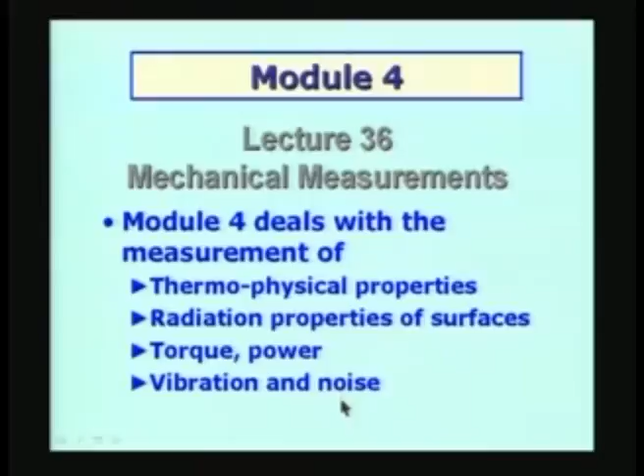The first topic I am going to look at is the measurement of thermophysical properties. It is a very vast area, and necessarily we have to restrict to a few important thermophysical properties. In my opinion, these are the ones which require a little bit of understanding, and the measurements are somewhat involved, and therefore I have included them in the presentation in this lecture and the subsequent lectures to come.

The quantities which will be of interest in thermal science basically are the properties of materials like thermal conductivity, which of course could be for any of the states of matter, solid, liquid or gas, and each one of them has a specific problem attached with it. Therefore we will certainly look at the measurement of thermal conductivity of various materials in the three states of matter.

We will be interested in the thermal capacity or heat capacity of the materials, and that will be dealt with subsequently. One of the important things which we require when we talk about power plants, either based on fossil fuels, gases or liquid fuels, is the measurement of calorific value of fuels. So we will deal with one or two examples of how to measure calorific value. Basically, the heat capacity and the calorific value of fuels are basically of the same type of measurements.

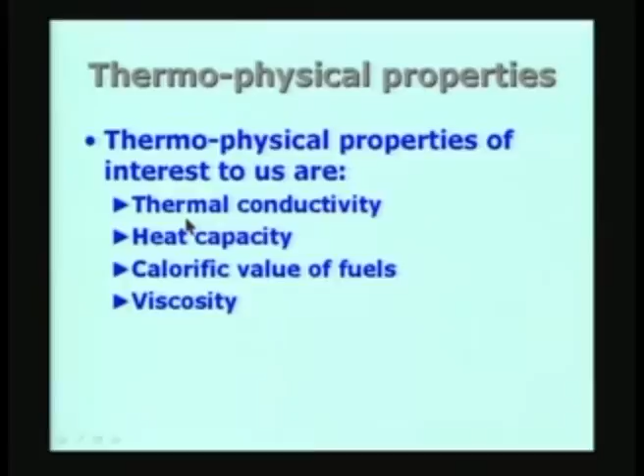The first thing I am going to look at is the measurement of thermal conductivity, and of course we will go on to the other topics as we go along.

Thermal conductivity, as you very well know, is a fundamental quantity of interest whenever we talk about heat transfer in any material, whether it is liquid, gas or solid. Of course, when you talk about only conduction heat transfer taking place, it is only in the case of a solid, assuming that the solid is stationary and there is no possibility of much movement in the macroscopic sense. So solid is the only case where thermal conduction can be actually studied in great detail.

In the case of both liquids and gases, immediately when you have a temperature gradient in the system, there can be some amount of movement because of density changes or density differences, and therefore we have bulk motion. So the main problem we will have to address when we talk about the measurement of thermal conductivity of liquids and gases is the mechanism of how we are going to suppress these fluid motions, how we are going to minimize the effect of convection, so that we can study the conduction phenomena in isolation. That will be the major difficulty.

So the various techniques available can be classified broadly into two broad categories. We call them the steady state methods, and of course we have the unsteady or transient techniques. Steady state methods generally take a lot of time in terms of the time required to bring the process from the beginning to the steady state and maintain the system in the steady state. So the steady state methods are usually time consuming, and some of these methods will require several days of time, not even hours, for the technique to come to the steady state condition.

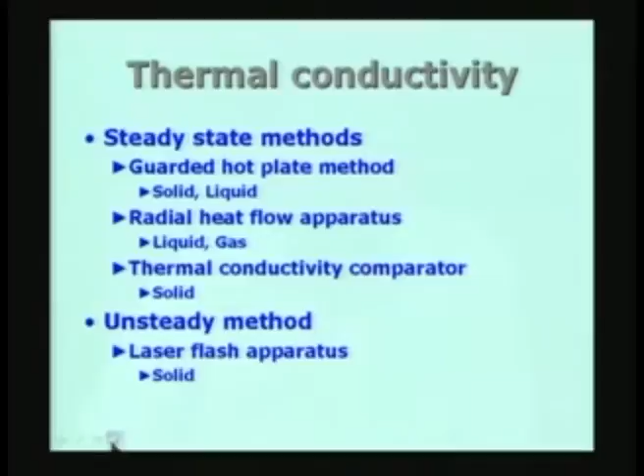Before we take a look at the details, let me just give a brief background on thermal conductivity, so that we understand what is required. We will look at the Fourier law of heat conduction, which is the basic law that is going to be used in conduction heat transfer.

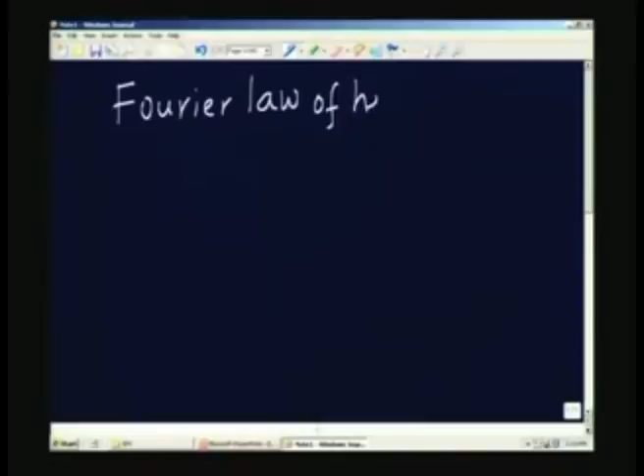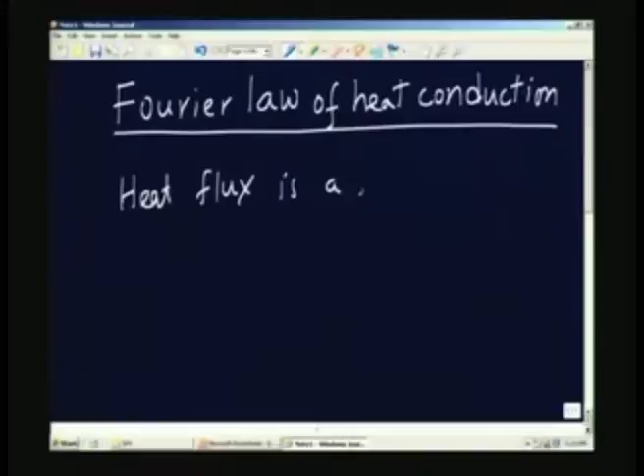The Fourier law of heat conduction states that the heat flux is a linear function of the temperature gradient. Temperature, of course, is a scalar quantity, and the temperature gradient will be a vector quantity, and heat flux is also a vector quantity because it has got both a magnitude and a direction.

What is done in practice is not to consider heat transfer in an arbitrary temperature field, but in a one-dimensional temperature field. So we will confine to heat conduction in one direction, or in a single dimension. This means that the temperature is a function of only one space coordinate, which we can call x, y, or z, whatever we want, and the temperature field varies only with respect to one coordinate, which is x, for example.

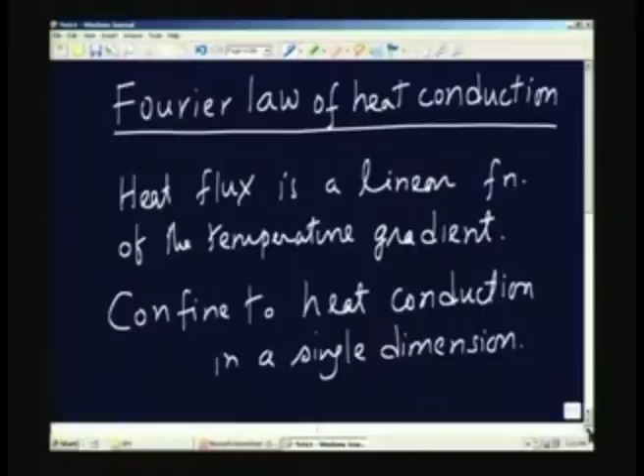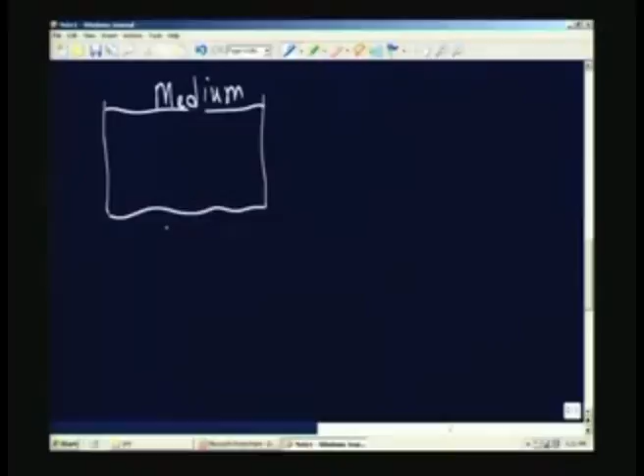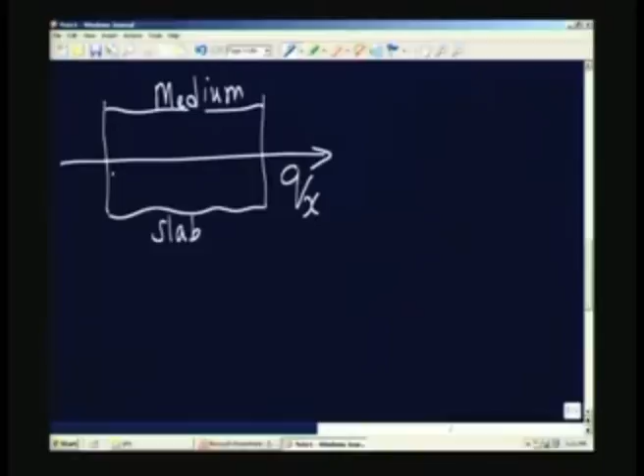So if I look at the Fourier law of heat conduction, now written for a single direction, I will show it by having a material medium in the form of a slab. So we will say this is a slab, and we have the direction of heat transfer indicated here. The heat flux is in the x direction, so the temperature will vary from left to right. If the temperature is something here, it will vary like that. This is T0, and we will say this is TL, and the thickness of the slab is L.

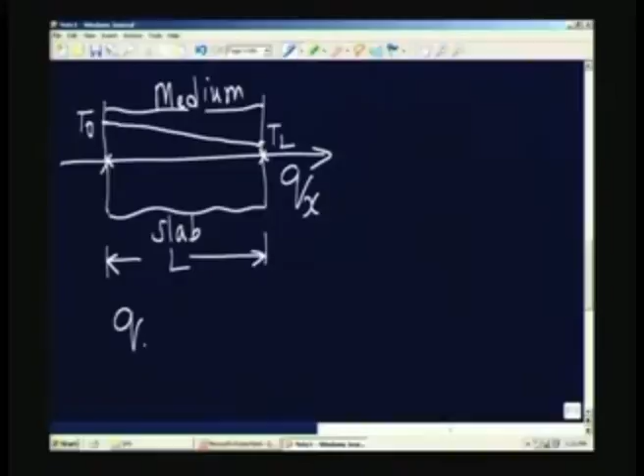So we will write the equation as Q in the x direction, given by K, the thermal conductivity of the solid or medium, multiplied by T naught minus T L divided by L. You can immediately see that the temperature gradient becomes T naught minus T L divided by L, and K is the factor, thermal conductivity, which is to be determined.

Qx is the heat flux by conduction, with units of watts per square meter, the rate at which heat is transferred per unit area per unit time, that is the amount of energy crossing per unit time and unit area of the slab. T naught and T L are the temperatures at the left and right end of the slab, and L is the thickness of the slab.

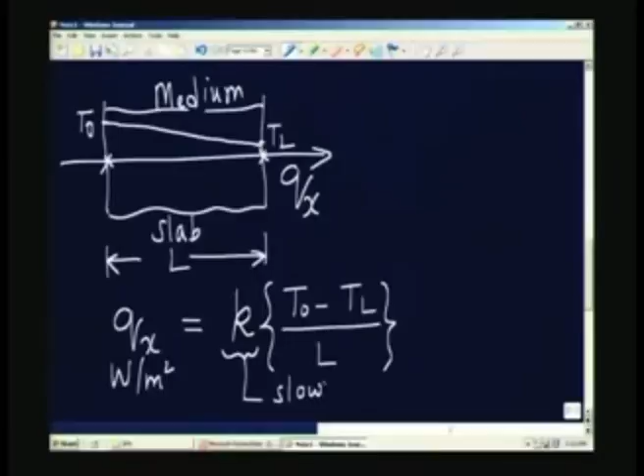Of course, I am assuming this is a slowly varying function of T, or maybe not varying at all with T. If I make sure that the temperature difference T naught minus T L across the slab is very small, I can say that the thermal conductivity I am going to determine is actually at the mean temperature of the solid, which is T naught plus T L by 2, since T naught minus T L is very small compared to the mean value.

So K is nothing but the thermal conductivity at the mean value. If I maintain a temperature difference of the order of 5 degrees, for example, between the two ends of the slab material, then it is close enough to being at the mean value, with the perturbation or change being only plus or minus 2 or 3 degrees. So it will satisfy the requirement that the thermal conductivity I am going to determine is at the mean value.

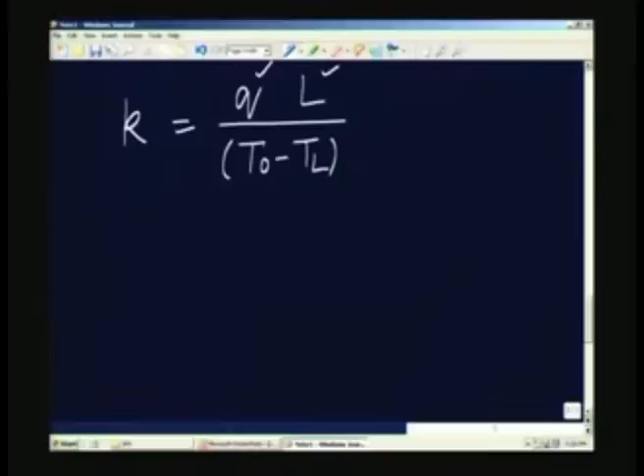Actually, what I am going to do is write it in the following way: K is equal to Q L divided by T naught minus T L, that is the expression for the thermal conductivity. It requires the measurement of Q, L, T naught and T L, 4 quantities are measured.

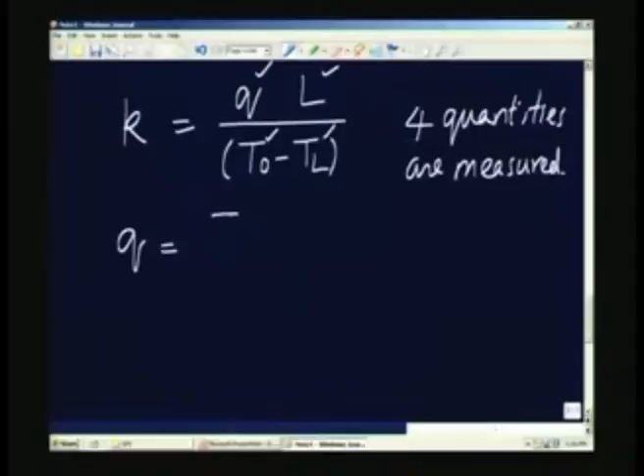Of course, in practice the temperature is measured using, for example, thermocouples. The length has to be measured using an accurate length measuring instrument. The Q is sometimes the most difficult to measure, because Q itself is the total heat transferred divided by the area through which the heat is transferred.

The major thing one has to remember is that we have to maintain a one dimensional temperature field. That means the temperature varies only with respect to x, and there is no significant temperature variation in the transverse direction, only variation should be along this direction.

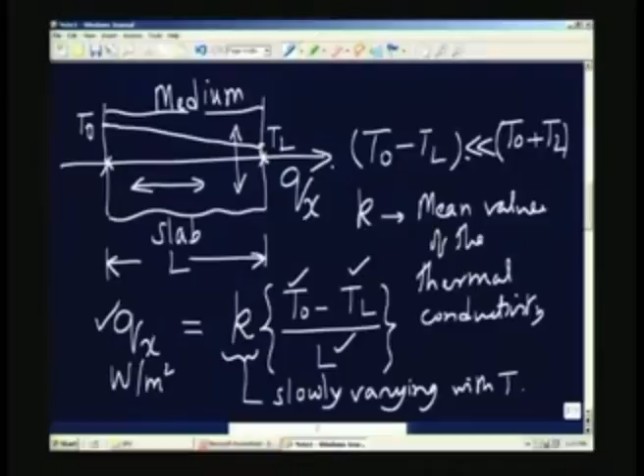That will be guaranteed only if Q is truly in the direction shown, with no heat loss in a transverse direction. Of course, if we have an infinitely large slab, it is easy to maintain that, but in practice an infinitely large slab is not possible. So we always have a finite size sample, and when the sample size is finite, it is difficult to maintain one dimensional heat transfer in the direction shown. So that is the major thing we have to look at: how to obtain heat transfer in one particular direction, one dimensional, without any losses in the transverse direction.

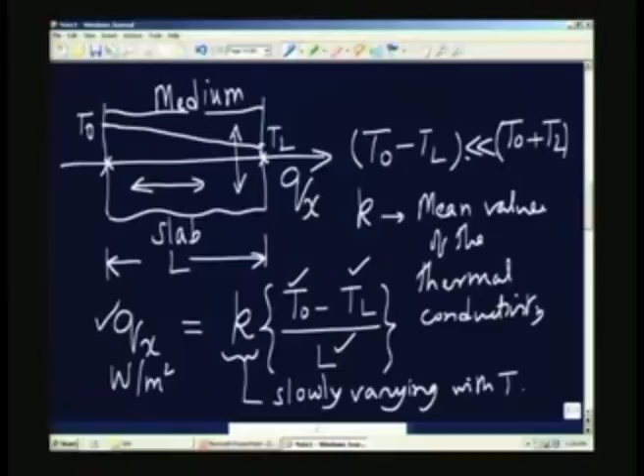Let us look at the principles involved in doing that, and I will try to do this with the guarded hot plate apparatus. I will indicate how it is done.

Before we do that, let me recapitulate or summarize what I have talked about. The first goal is to achieve a one dimensional temperature field within the medium. I have to measure the heat flux, that is the amount of heat transferred per unit area in unit time. I have to measure the temperature gradient, either by measuring the temperatures individually and the length separately and taking the ratio. Using these four quantities, Q, L, T naught and T L, I will be able to estimate the thermal conductivity.

The additional problem when we come to liquids and gases is how to suppress convection. In the case of solids, there is no possibility of macroscopic movement, so I do not have to worry about suppressing convection. For liquids and gases, either I use a very short time for the experiment, as in unsteady or transient methods, or I have to take special precautions so that these movements are not present.

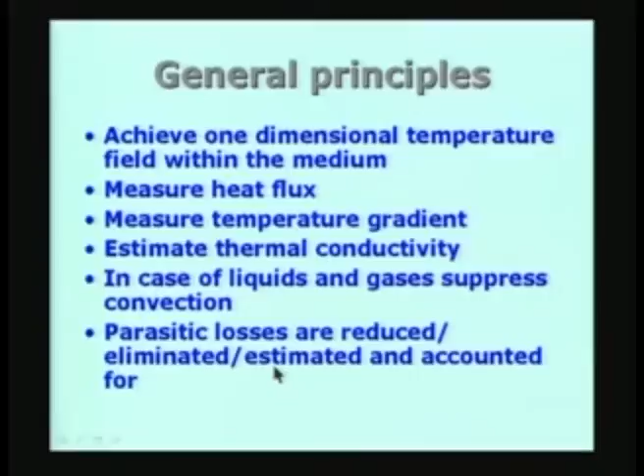Finally, we have to look at the parasitic losses. Even though we say we will achieve a one dimensional temperature field, how closely are we able to do that? There will always be some parasitic losses; these have to be reduced or eliminated, or in the worst case we have to estimate what these losses are and account for them, so that the estimated value of thermal conductivity is of acceptable accuracy.

So let us look at one simple arrangement. Earlier, when we talked about the measurement of heat flux, we already looked at the concept of the guard. A guard heater helps reduce losses in the transverse direction, and therefore makes the temperature field or heat flux one directional or one dimensional.

In the guarded hot plate apparatus, for a solid sample, I take two samples of identical size and thickness, same material, same physical dimensions, and use them in a symmetric arrangement. I have a heater in between these two samples in a sandwich construction. The red symbol is the main heater, and the blue is the guard heater. I will explain this in more detail in the next slide.

We have the sample on the two sides, occupying the entire width, which is the size of the main heater plus the guard heater, placed symmetrically on top and bottom. The other surface of the sample, both top and bottom, is cooled by cold water coming from a cooler. The water comes in cold, removes the heat transferred from the heater across the sample by conduction, and goes out, symmetrically on the bottom as well.

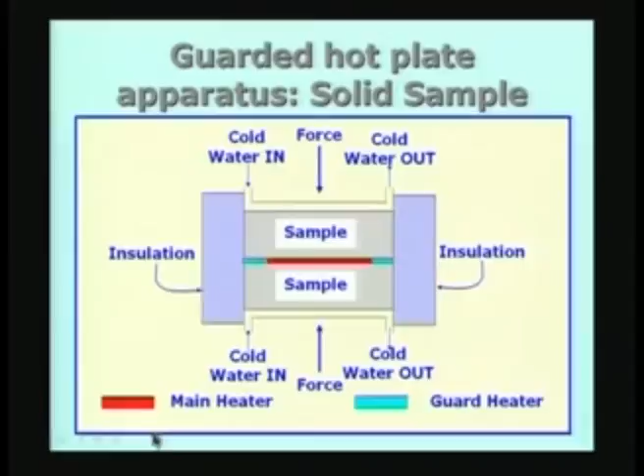Let us look at the typical construction of the guard and main heater. This sketch indicates what is happening. We have the main heater, which is something like 200 millimeters by 200 millimeters - this is the smallest size. You can have a much larger size if one wants to, even 1 meter by 1 meter. In some situations, it is necessary to use very large sizes. Of course, if we use a large size, a large amount of heat has to be supplied, and you also require a very large sample.

So the minimum is something like 200 millimeters by 200 millimeters for the main heater, and then you have a 50 millimeter wide guard heater all around the main heater with a small narrow gap. Of course, the gap I have shown here is too large - it's only for the sake of illustration. The gap itself can be something like a couple of millimeters in this case. So you have a 50 millimeter wide guard heater, then a 200 by 200 millimeter main heater, and we fix thermocouples as shown here.

Across the gap I have 2 thermocouples. These closed circles are thermocouple junctions - I have 2 junctions here, 2 here, 2 here, and 2 here, and the delta T, the temperature difference indicated by these thermocouple junction pairs, must ideally be equal to 0. That means, in any particular experiment, I am going to dial up the amount of heat given to the main heater to a particular value, then adjust the amount of heat supplied to the guard heater such that the delta T across this gap is 0.

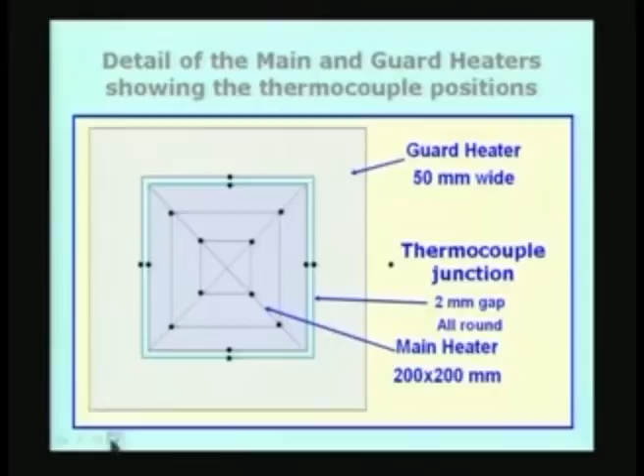So, let us look at the typical experimental conditions which we are going to have. The sample size: 200 by 200 by 25, this is for the main guard region, the main heater region, plus 50 mm you add on all these sides. So actually the sample size will be 300 by 300, 200 plus another 50 on either side. So, 300 by 300 by 25 mm. This is the main heater size only I have given here.

Typical is this: the heat input is adjusted such that the temperature difference across the thickness of the specimen is roughly equal to 5 degrees. We do not want to have a very large temperature difference across the thickness of the sample.

The question now arises as to what do we do if we have a high thermal conductivity material, and what do we do when the thermal conductivity of the material is very low? You can immediately say that from Fourier's law, if the thermal conductivity is small, for a given heat transfer you require a larger temperature difference. Or, putting it another way, if the thermal conductivity is small, for a given temperature difference the amount of heat input is small.

So, if you want to have a 5 degree Celsius difference across the thickness of the material, you have to adjust, knowing roughly the thermal conductivity value of the material, so we can find out what is the amount of heat I have to supply. That will vary depending on the material.

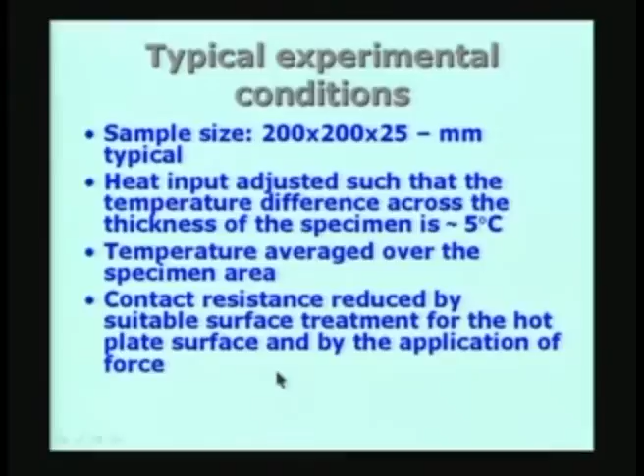As indicated earlier, the temperature is averaged over the specimen area using several thermocouples in parallel, so you get the average value. The contact resistance is reduced by suitable surface treatment of the hot plate and the other surface, and by application of force, which helps bring out a good physical contact. A good physical contact coupled with surface treatment means good thermal contact, so contact resistance can be reduced by this method.

With this basic understanding, let us look at the example. This is example 41. We have a guarded hot plate apparatus used to measure the thermal conductivity of insulating material. The specimen thickness is 25 plus or minus 0.5 millimeter. The heat flux is measured within 1%, and the nominal value has been obtained as 80 watts per square meter. The temperature drop across the specimen under steady state has been measured to be 5 plus or minus 0.2 degrees Celsius.

So all the measured values I have taken as the nominal value plus or minus the expected error: 0.5 mm in the case of thickness, 1% in the case of heat flux, and plus or minus 0.2 degrees Celsius in the case of temperature difference. Determine the thermal conductivity of the sample along with its uncertainty. I will work it out on the board.

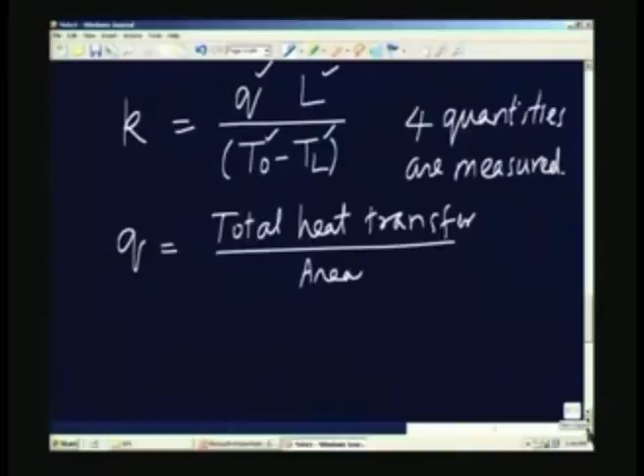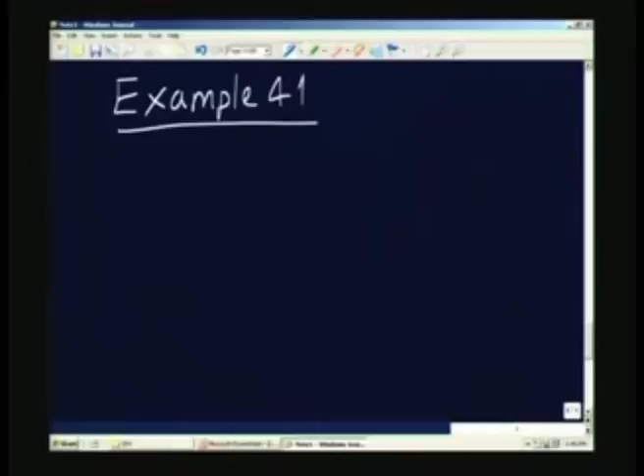So this is example 41. The heat flux is directly given. In practice, one would have to measure the total heat supplied to the main heater divided by the area of the main heater to get the heat flux. In this case, it is directly given. Therefore, I will write Q as 80 watts per square meter. This is the nominal value, and the error is plus or minus 1%.

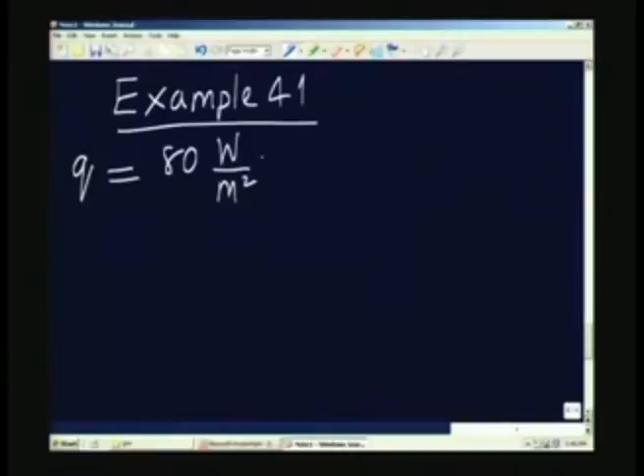Then I am given the thickness of the sample, L, which is 25 millimeters, that is 0.025 meters, plus or minus 0.5 millimeters, which comes out to plus or minus 0.0005 meters. I am writing everything in SI units. The delta T has been measured as 5 degrees centigrade plus or minus 0.2 degrees Celsius.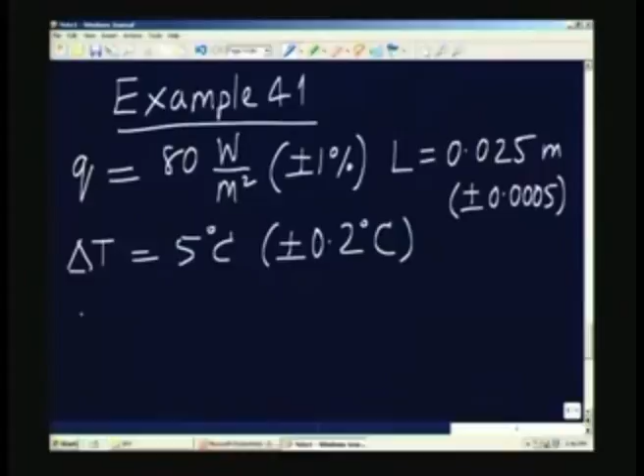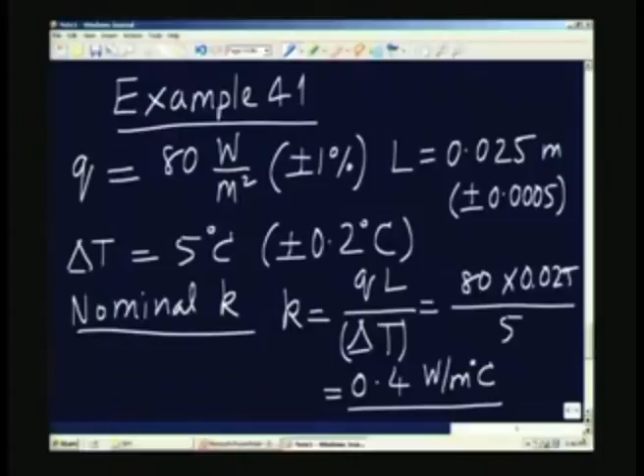It's a very simple problem. So the nominal K can be calculated using the Fourier law of heat conduction, which is Q L by delta T, where T naught minus T L is nothing but delta T. This will be 80 multiplied by 0.025 divided by 5, which comes to 0.4 watts per meter degree Celsius. This is the nominal value. It is very simple, straightforward: plug into the expression and get the value of the thermal conductivity.

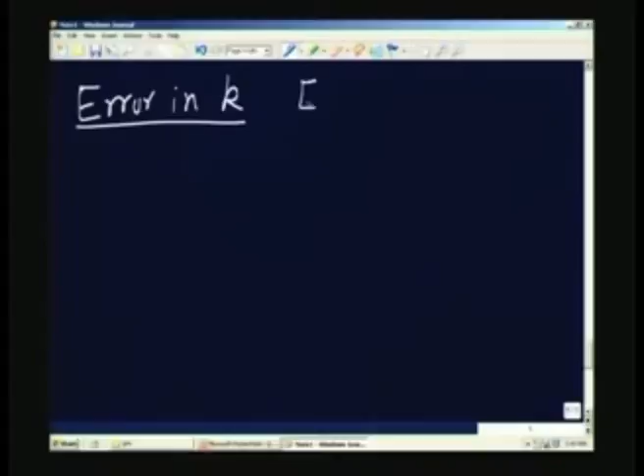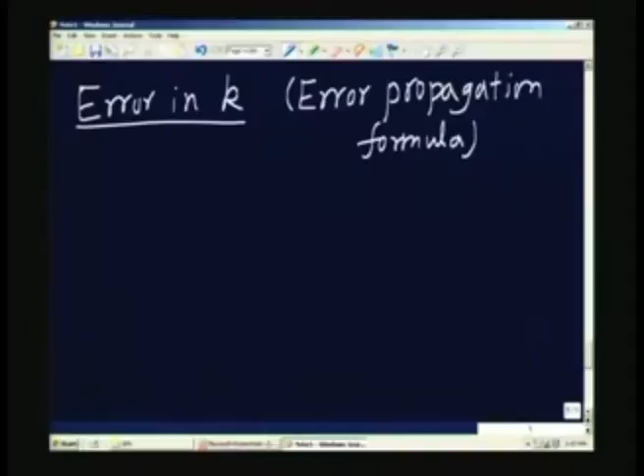The next part is to look at the error in K. I have to use the error propagation formula, which is familiar to us from our first module when we discussed estimation of errors in measured quantities. Here we are measuring Q, the heat transfer per unit area per unit time, the thickness, and the delta T. All of them are prone to errors. Since K is related to the other quantities as the product of Q and L divided by delta T, I can use logarithmic differentiation to obtain the value.

Delta K by K will be plus or minus the square root of delta Q by Q whole squared, plus delta L by L whole squared, minus delta T by T whole squared. Of course, because it is squared, this minus sign is not going to make any difference, so I can just write the quantity.

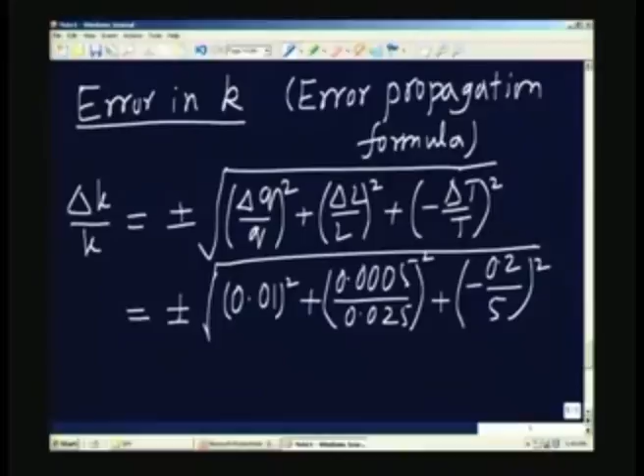Delta Q is 1%, so delta Q by Q is 0.01 whole square. Delta L by L, I can substitute as 0.0005 divided by 0.025 whole square, plus 0.2 divided by 5 whole square. All are ratios. When you compute that, the entire thing comes to plus or minus 0.042. So delta K by K equals 0.042, or about 4.2%.

This is a very typical value of error when you use a guarded hot plate apparatus. According to normal standards specified for the guarded hot plate apparatus, about plus or minus 5% is the expected uncertainty in the value of the measured thermal conductivity, and in this particular example it is within that value, so we can say this is plus or minus 4.2%.

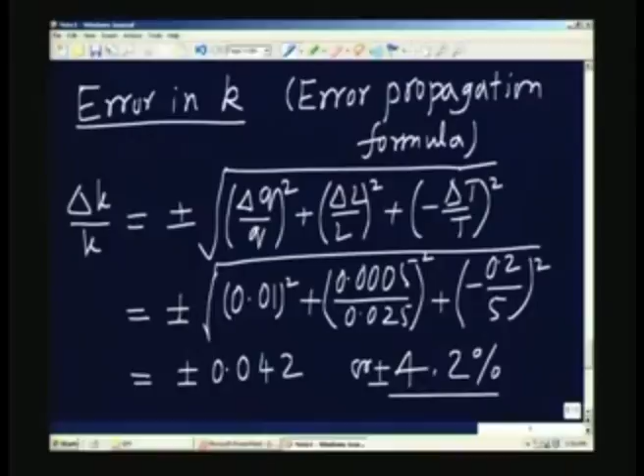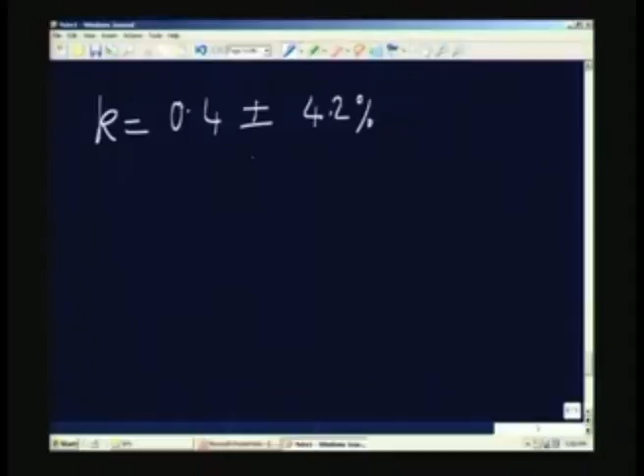I can now specify the value of the thermal conductivity of the solid will be 0.4 plus or minus 4.2%. This is in watts per meter degree. So I can specify it as 0.4 plus or minus 4.2%. That is the value we will get using this particular method.

So what we have done is to look at the measurement of thermal conductivity of a solid using a guarded hot plate apparatus, and we have taken an example and seen how to work it out and also seen the type of expected error in this measurement.

If we recapitulate what we have already talked about regarding measurement of temperature, measurement of heat flux and so on, the numbers I have used in this example are typically the numbers we discussed earlier. In the case of measurement of temperature difference, plus or minus 0.2 degrees is an achievable value. Similarly, with respect to heat flux and the specimen thickness, plus or minus 0.5 millimeters is a very reasonable value.

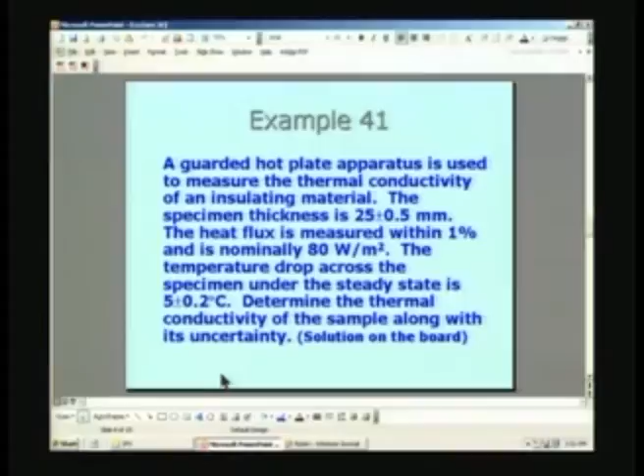Actually, the reason it comes out as plus or minus 0.5 is not because we are unable to measure the thickness, but because many times the guarded hot plate apparatus is used for measurement of the thermal conductivity of a sample as received from the manufacturer. You just cut a small portion of the slab, usually in the form of a slab or plate, and you do not do much surface treatment - no treatment is given on the surface, no machining is done. Usually it is just taken as a slab as obtained from the manufacturer.

And many times we use this method. In this case, for example, the material has a thermal conductivity of 0.4, which is characteristic of an insulating material, and usually this thickness is not very closely specified for such things, so plus or minus 0.5 mm seems to be a reasonable number. It's not measurement related - it may be that the material itself, the thickness, does vary this much from position to position.

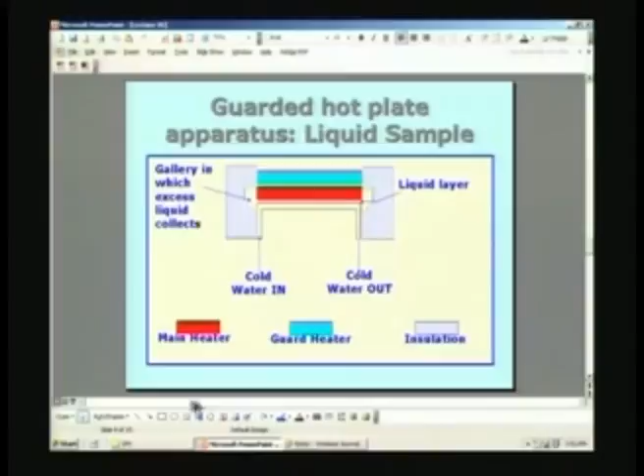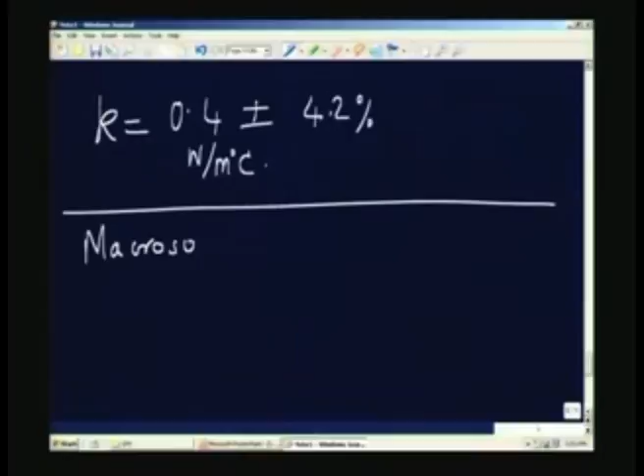Let us look at what we have to do if we want to use the guarded hot plate apparatus for a liquid sample. The main thing I have already mentioned is that when you use a liquid sample, there is the possibility of macroscopic movement of the liquid.

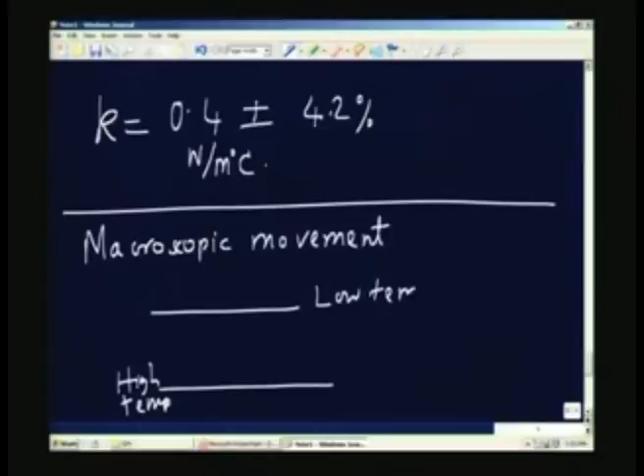Suppose I have a situation like this: I have a high temperature here, a low temperature here, and suppose I have a liquid here. Normally, at high temperature the density is smaller, and at low temperature the density is higher, so the liquid will be lighter near the hot wall and will tend to move up, and the colder liquid will come downwards. So you expect some kind of up and down motion. This is referred to as natural convection.

What is the consequence of this natural convection? The heat transfer is not simply by conduction, it is also because of this bulk motion, and therefore the heat transfer is actually much more than it would be if heat transfer were by pure conduction alone. So if I make an experiment as shown here, with high temperature at the bottom and low temperature at the top, I am certainly not going to measure the thermal conductivity - I am measuring something that includes also this effect of the thermal motion.

So you can immediately see that if I were to put the high temperature at the top and the low temperature at the bottom, much of this movement can be completely restricted. That means the natural convection which occurs because of density gradients can be reduced or eliminated by using high temperature at the top and low temperature at the bottom.

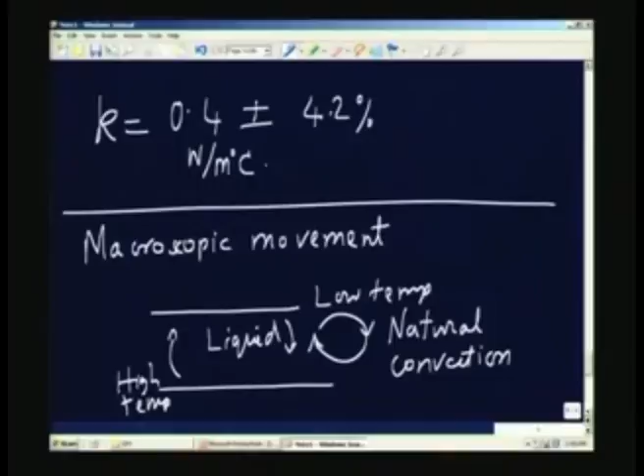This is the first thing we are going to do. The second thing is the thickness of the liquid layer. If the thickness of the liquid layer is very small, it inhibits natural convection. Therefore, two things I can do.

I will take the liquid in the form of a very thin layer, maybe a few millimeters or even less than a millimeter, so that there is not enough chance for natural convection to set in. Secondly, I am going to put the high temperature at the top and the low temperature at the bottom, as shown in the next slide, where I have the main heater here, and because I want high temperature at the top and low temperature at the bottom,

I cannot use the symmetric arrangement we had earlier. If you remember, in the case of solid, I had two samples, one at the top and one at the bottom, and half the heat went from the top side and half from the bottom side. Here I cannot have that facility, because I want high temperature at the top and low temperature at the bottom. The only way to do that is to have a single layer of the sample.

So I have a single sample layer, and therefore the main heater in this case has to be backed by a guard heater. There is a guard heater here and the main heater here. What I will do is monitor the temperature difference across these two, and if it is made equal to zero by suitably controlling the amount of heat given to the guard heater, then I can assume that all the heat generated in the main heater has to go only from the bottom through the liquid layer.

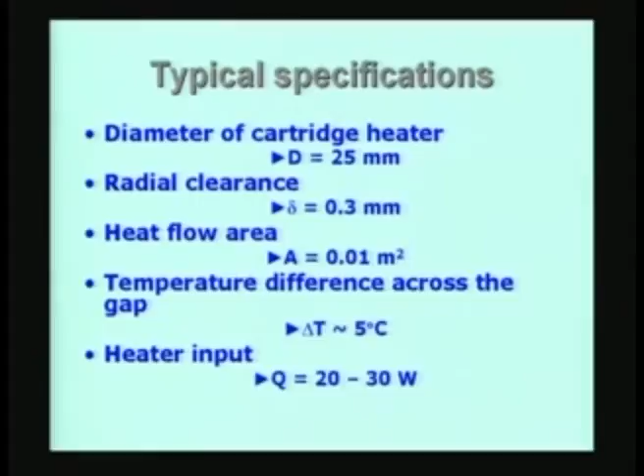But before we do that, let us just look at the typical numbers. Diameter of the cartridge roughly 25 millimeters, radial clearance 0.3 millimeters, the heat flow area pi d into L is about 0.01 square meters, the temperature difference across the gap is roughly of the order of 5 degrees, the heat input can be between 20 and 30 watts depending on the liquid or gas taken inside. If it is a gas, the heat transfer will be much lower. If it is a liquid, it could be 20 to 30 watts of heat put in, and the heat is put in the form of electrical heat.

The cartridge heater contains an electrical resistance inside, and you measure the heat supplied by the amount of electrical power you supply to the heater. If you know the heater resistance and the voltage across the leads of the heater, I can find out the amount of heat input, and that will be exactly equal to the amount of heat going through the narrow gap through the sample by conduction plus any losses. The difference between the previous method, where I had a guard to reduce heat losses, and here, is that in this particular case the losses are not zero, the losses have to be estimated.

If you remember, in the very first slide I said the losses can be reduced, eliminated, or estimated and accounted for. So in the present case, what I have to do is find out what the loss is, and let us look at how I am going to do that.

Suppose I take either a liquid or a gas of known thermal conductivity in this gap. The easiest thing is to take air - you do not have to do anything, air is everywhere, you just allow the entire gap to be filled with air. So the gap here is full of air, and the thermal conductivity of air has been measured by various people, and very accurate values are available from the literature.

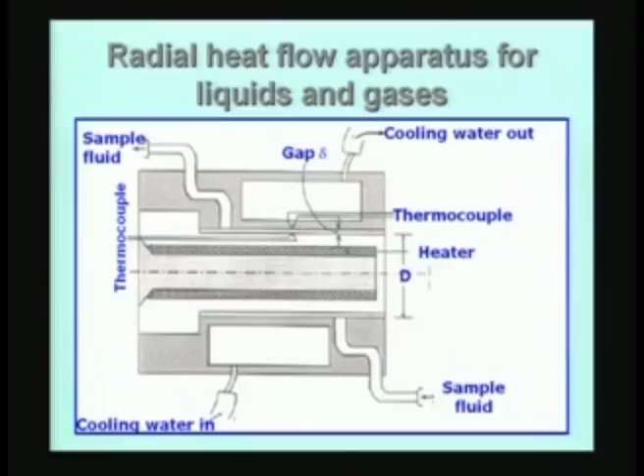So I will find out this amount, and then I also measure the amount of heat input into the cartridge heater. If I take the difference between these two, that will give the loss. Let me just write it on the board.

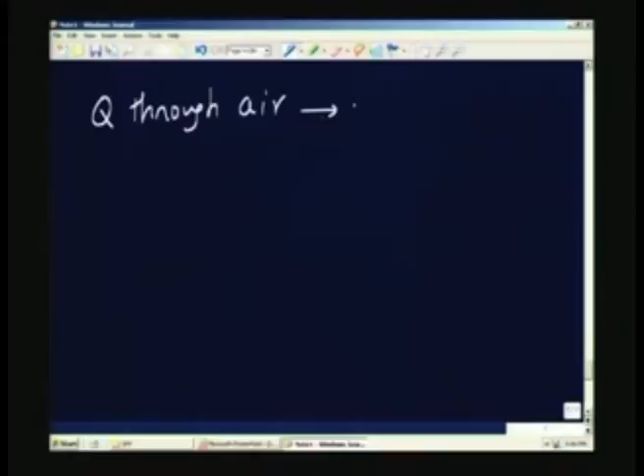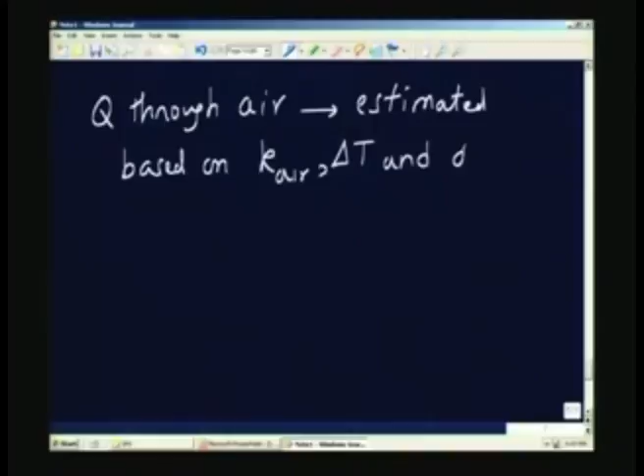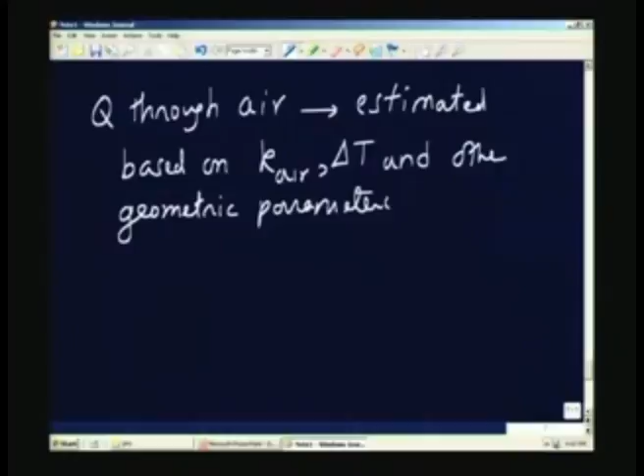So what I am going to do is: Q through air is estimated based on K of air, delta T, and other geometric parameters. So we know that Q through air will be K multiplied by delta T divided by delta, because we are assuming that the radial clearance is very small.

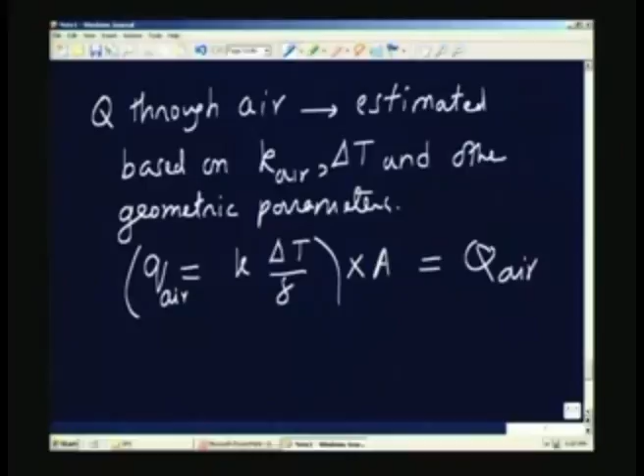So it is almost like slab heat transfer through a plane parallel layer: K delta T by delta, and if I multiply this by A, the heat transfer area, I will get Q through air. Q supplied minus Q air equals the loss, we will call it L, and this will be a function of delta T, the temperature difference across the gap.

So the theoretical basis is the following: when I have a different sample, not air, in that gap, I am assuming that if the temperature difference across the gap is the same as in the air experiment, the amount of heat loss is not going to change much. So the experiment with air, whose thermal conductivity is known, gives me a handle on the problem of heat loss from the system, which will be a function of delta T.

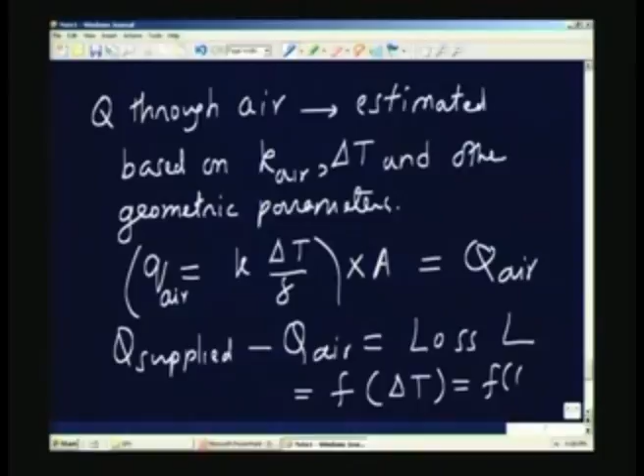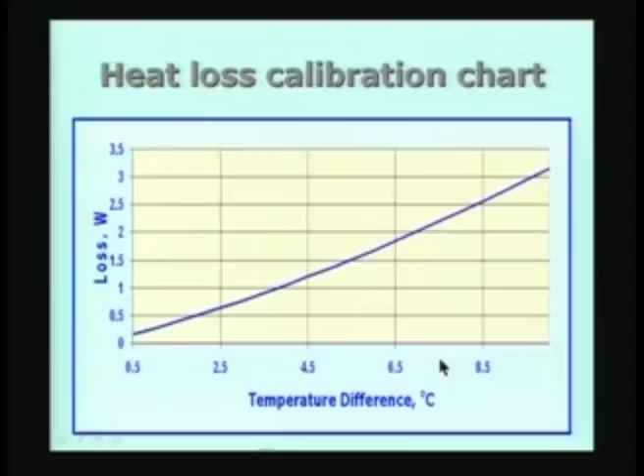The second point is, because the gap between the two is very small and the delta T is also very small, generally of this order, there is no appreciable movement of the liquid, and therefore I can assume that it is purely conductive heat transfer. We will pursue a problem corresponding to this particular technique in the next lecture.